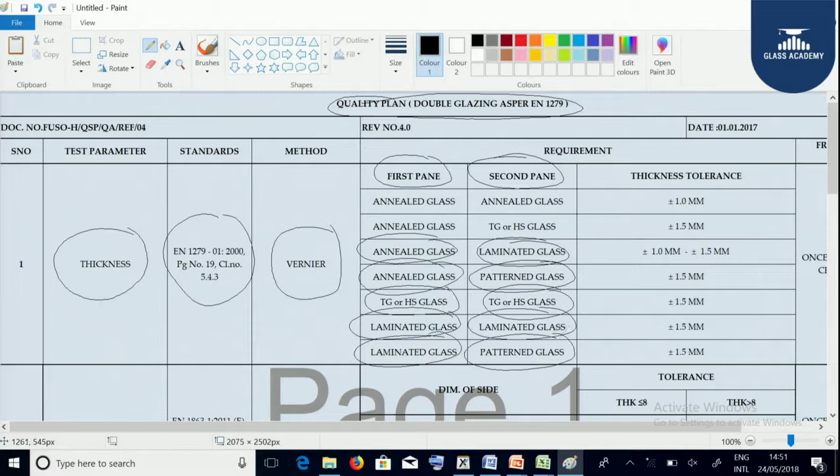As it is a double glazing unit, it consists of minimum 2 panes of glasses, the first pane and the second pane. The pane of glasses can be either annealed or toughened or HS, annealed or laminated glass, annealed or patterned glass, toughened or HS glass, lamination with laminated glass, laminated and patterned glass. So the combination of the panes can be any.

So here we need to understand thickness tolerance. When the glass is of annealed combination, the overall thickness allowed is plus or minus 1 mm. When the glass combination is annealed and toughened or HS glass, the overall thickness tolerance is plus or minus 1.5 mm. When the glass combination is annealed and laminated glass, the thickness tolerance shall be plus or minus 1 mm to plus or minus 1.5 mm.

When the glass combination is annealed and patterned glass, the thickness tolerance is plus or minus 1.5 mm. When the glass combination is toughened or HS glass and toughened or HS glass, the thickness tolerance is plus or minus 1.5 mm. When the glass combination is laminated glass plus laminated glass, the thickness tolerance is plus or minus 1.5 mm. When the glass combination is laminated glass and patterned glass, the thickness tolerance is plus or minus 1.5 mm.

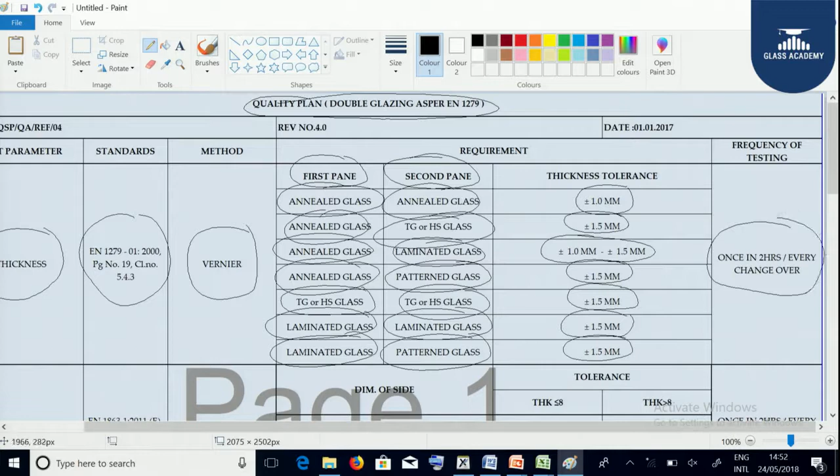The frequency of testing shall be once in 2 hours or every changeover. Whenever there is a change of thickness, then we need to recheck the thickness of the overall DGU.

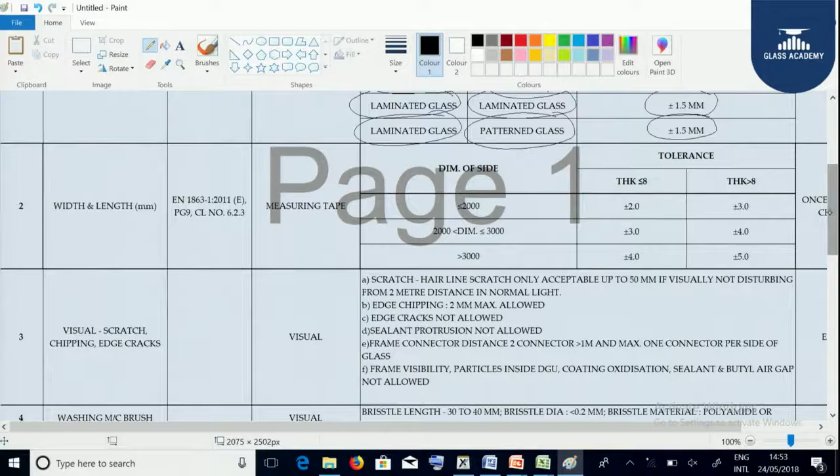Next, the second parameter is length and width, similar to the pre-process or tempering standard, that is EN1863 or EN12150. Visual inspections like scratches, chipping, edge cracks, all these are applicable as per the pre-process and tempering standards.

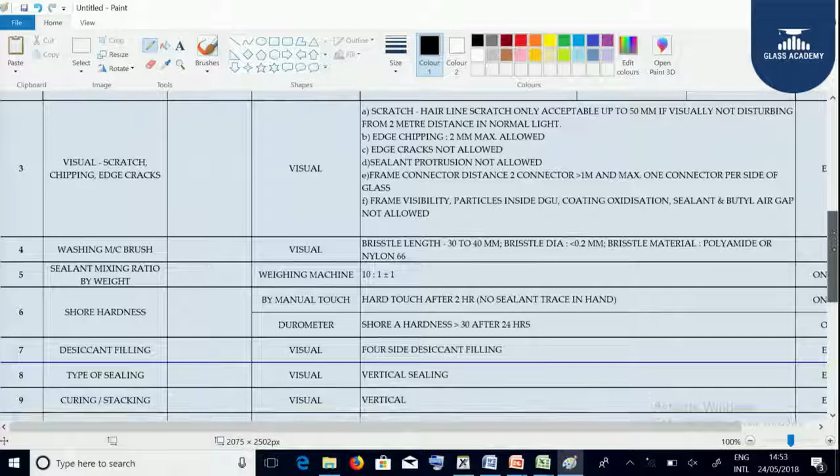Here we need to understand a few parameters: the washing machine brush quality, and we need to check the sealant mixing ratio. We generally measure with respect to volume and by weight, 10:1 plus or minus 1.

Here we need to check a few test parameters, like the shore hardness test. The tool we follow is the shore hardness meter, also called a durometer, and if it is a single part component, we use the manual touch method.

Next we need to check the desiccant filling, and in a particular linear meter of spacer how much desiccant we need to fill, and in all edges we need to fill. Type of sealing, whether it is vertical or horizontal sealing. Curing, what is the curing and stacking, that we need to address.

What is the delta T, that is the temperature difference, that we need to understand, and everything we will be undergoing through the lab tests that are coming in the later sessions.

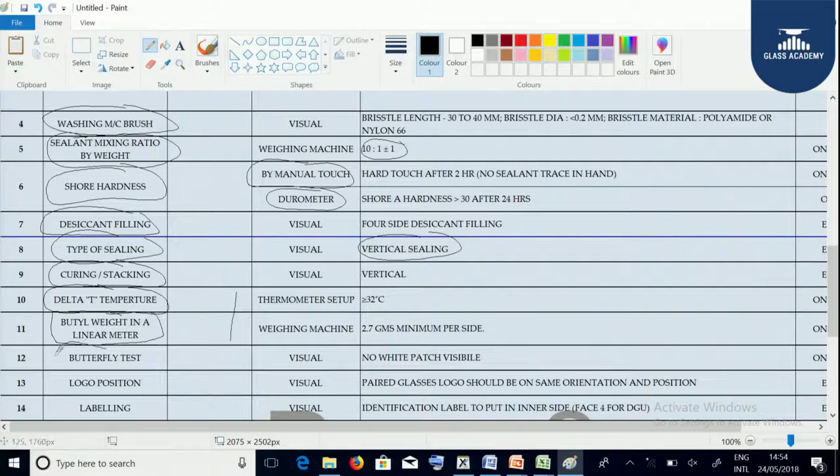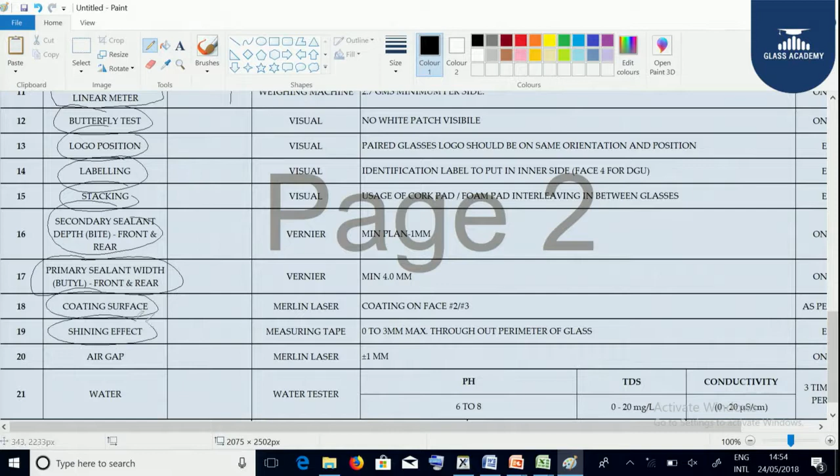We need to check the butterfly test. Next we need to see the secondary sealant depth. We need to see how we are stacking, what is the labeling position, where we are using the logo. Primary sealant butyl, how you are keeping front and rear coating surfaces, shining effect because of edge deletion, air gap, water - all these parameters we need to understand and keep in mind when processing a double glazing unit.

We can overcome this issue by checking the water parameters like conductivity, pH and salt contents in the water, and clean the rollers with acetone on a regular basis.

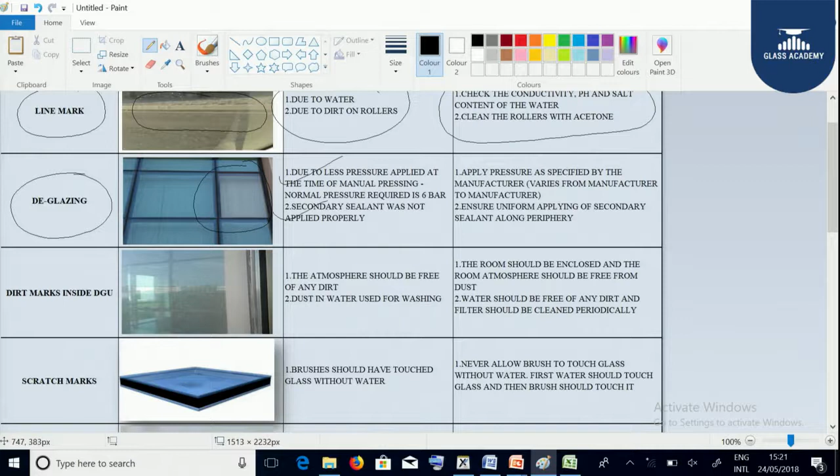Secondary sealant was not applied properly. We can overcome these issues by applying pressure as specified by the manufacturer, and ensure uniform application of secondary sealant along the periphery of the glass.

You can see the dirt marks inside the DGU in the figure. The reason being the atmosphere should be free from any dust, and water used for washing should also be clean.

We can overcome these issues. The room should be clean and enclosed, and room atmosphere should be free from dust. Water should be free of any dirt, and the filter should be cleaned periodically.

Next you can see the scratches on the glass surface. This is because the brushes should have touched the glass without water.

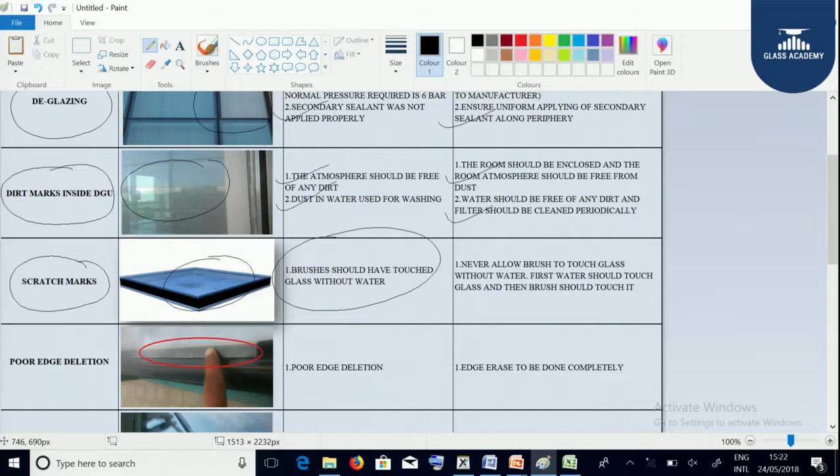We can overcome this issue by never allowing the brush to touch the glass without water. First the water should touch the glass, and then the brush should touch the water.

Next one is poor edge deletion. You can see here in the figure the edge deletion that we have done on the glass is not complete. If there is poor edge deletion, you can see the traces of the coating.

Our intention is that the coating surface should be completely removed, and the surface should be as good as clear glass.

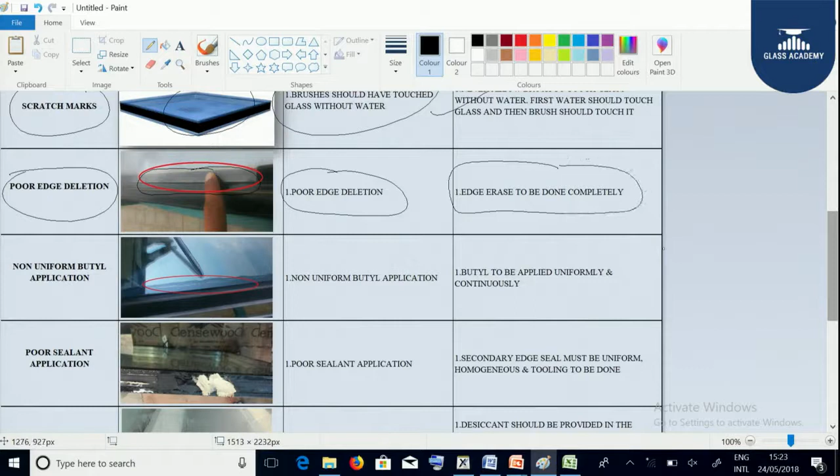This is because of poor edge deletion, and we can overcome this issue by properly doing the edge deletion with the proper wheel and proper pressure.

Next one is the non-uniform butyl application. You can see in the figure the butyl is like a zigzag line. Always the butyl should be straight and continuous.

The butyl acts as a moisture barrier. The reason for the zigzag line is non-uniform butyl application, and we can overcome this issue by applying butyl uniformly and continuously.

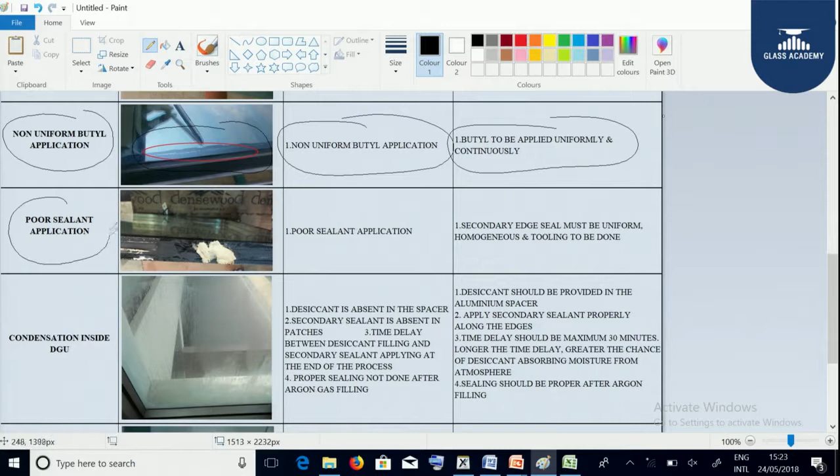Next defect we are going to get in DGU is poor sealant application. You can see there is insufficient depth or a continuity missing in the sealant.

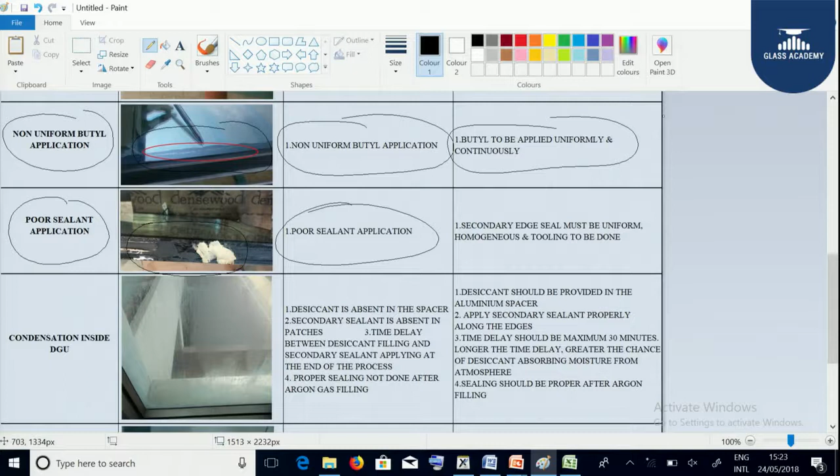The reason is poor sealant application. We can overcome this issue by maintaining a proper edge seal with uniformity, and tooling should be done once the pasting is done.

Next defect we are going to get is condensation inside the DGU, that is, moisture is trapped inside the DGU. The reasons are desiccant absent in the spacer, or secondary sealant absent in patches.

Other reasons include a time delay between the desiccant filling and the secondary sealant applying at the end of the process, or proper sealing not done after argon gas is filled.

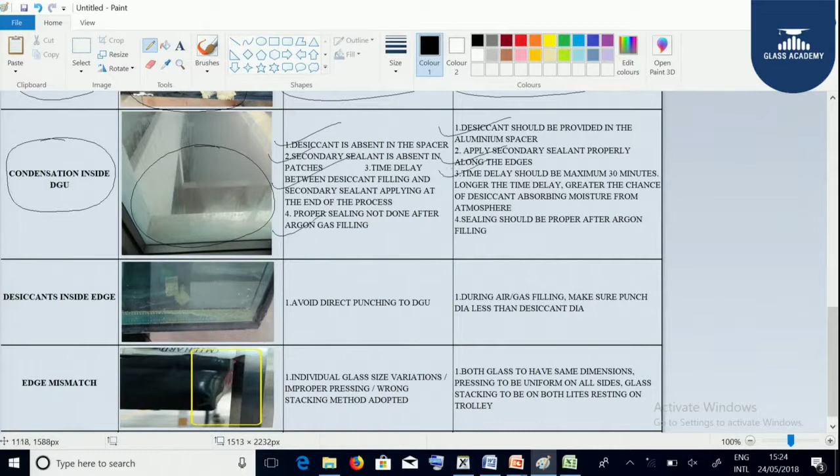We can overcome these issues: desiccant should be provided in the aluminum spacer, apply secondary sealing properly along the edges, and the time delay should be a maximum of 30 minutes. The longer the time delay, the greater the chances of desiccant absorbing moisture from the atmosphere.

And sealing should be done properly after the argon gas is filled.

The next defect you are going to get is desiccants inside the DGU. You can see here the desiccants have fallen inside the DGU. The reason is we should avoid direct punching to the DGU.

Generally, whenever we go to any glass which has desiccant inside, the major cause is the DGU got drilled, so we need to avoid direct drilling of the spacer.

We can overcome this issue with air or gas filling. Make sure that the punch diameter is less than the desiccant diameter.

Next defect you can see is the edge mismatch. You can see with the right angle there is an offset of the edge in the figure. The reason is individual glass size variations, improper pressing, or a wrong stacking method adopted.

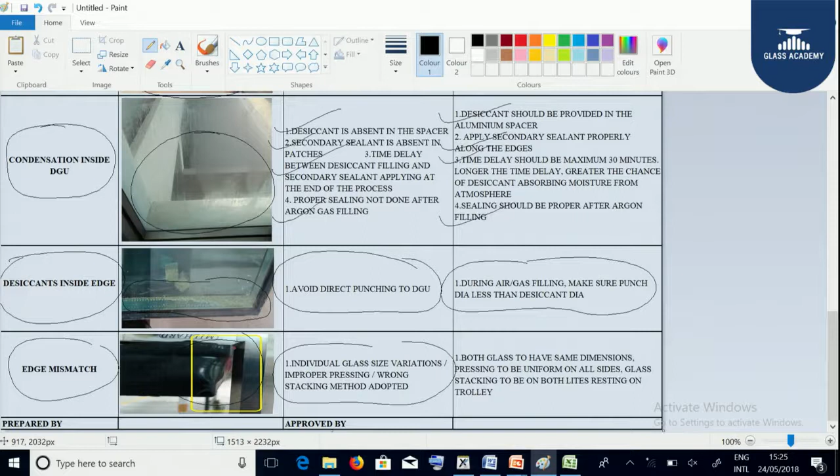You can overcome this issue by ensuring both glasses have uniform dimensions, pressing is uniform on all sides, and glass stacking is uniform, resting evenly on the trolley.

So now we will be starting the various tests applicable for an insulating glass unit. Let us start with the butterfly test, which we perform on the secondary sealant.

The secondary sealant is available in three forms in the market: for insulating glass units, for structural glazing units, and for weathering sealant. Now let us take the insulating glass sealant.

The purpose of doing the butterfly test is, since the secondary sealant is a two-part component, we need to maintain the homogeneity of the two parts of the sealant. One of the tests used to check homogeneity in the mixing is the butterfly test.

The procedure is: first we take a bead of sealant onto a piece of paper, fold it, and then try to open it.

When we open, the shape of the sealant shall come like a butterfly, that is why it is called a butterfly test. If once you open the paper and you are able to see any white patches in the sealant, then there is a mixing issue in the sealant. If there is no mixing issue, the sealant will come out black. So through this butterfly test, we are ensuring that the homogeneity of the mixing of the two-part sealant is maintained.

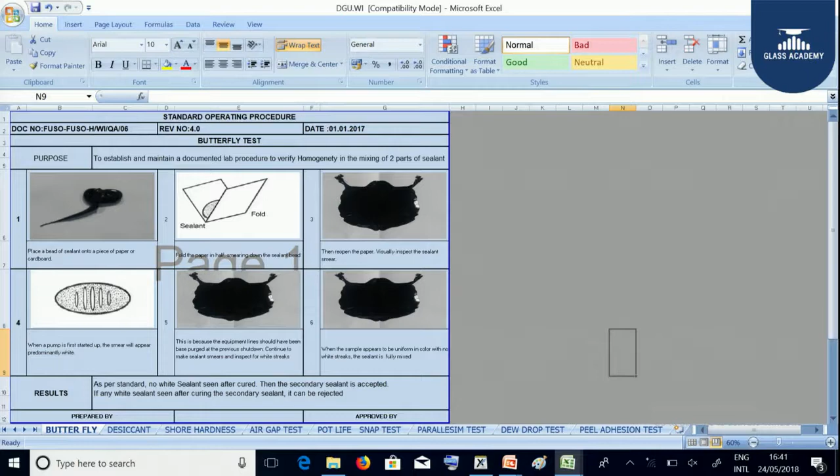Next test is a desiccant test that we use inside the spacer to absorb the moisture. First we'll take 20 ml of water in a beaker, then measure the temperature of the water. Then we'll take 20 grams of desiccant and pour it inside the water, and we'll check the temperature after the desiccant is kept inside the water.

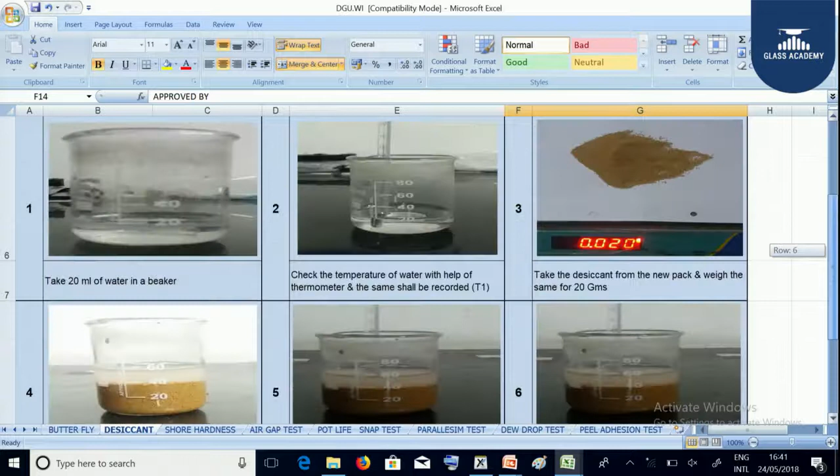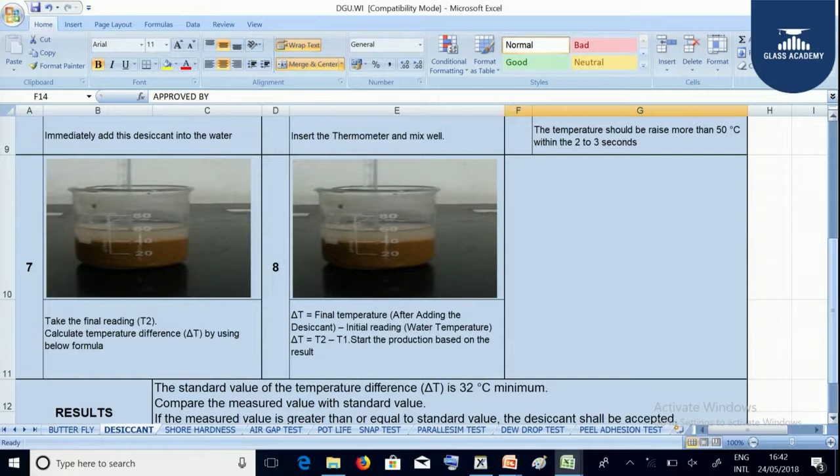Within a fraction of seconds, the temperature will rise. Then we'll calculate the temperature difference, that is, after adding the desiccant what is the temperature minus initial water temperature, which gives the desiccant temperature, and it should be minimum 32 degrees centigrade. The standard value for temperature difference is 32 degrees centigrade minimum.

Next we'll see the shore hardness test. This test is used to check the hardness of the secondary sealant. The procedure is we take a 2-part sealant into a 100 by 100 mm square plate of 10 mm thick layer. Then we apply secondary sealant on the 100 by 100 mm square area, and after 24 hours of production we try to see the hardness with the help of a shore hardness tester.

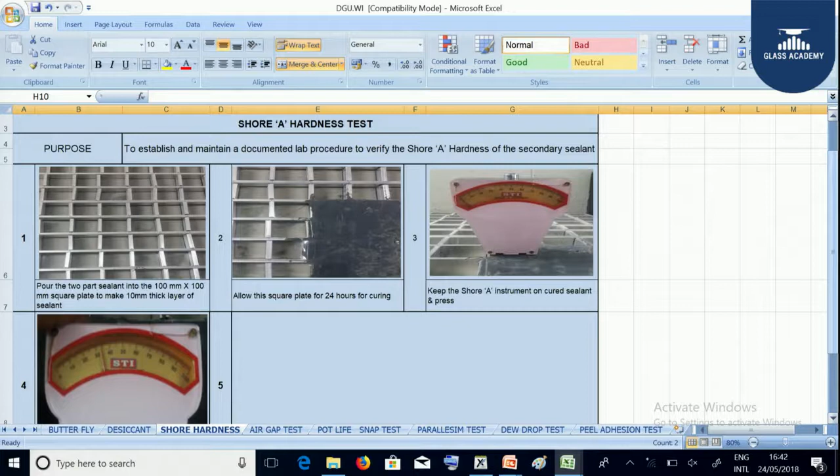We keep the shore hardness tester on the sealant and measure the reading. If you get more than 30, it's a good sealant. The standard acceptable value is 30 to 50 shore for secondary sealant. If you get a lower value, it still requires curing, and if you get a higher value, there are chances of the sealant becoming a sticky material. Secondary sealant should act as a rubber material.

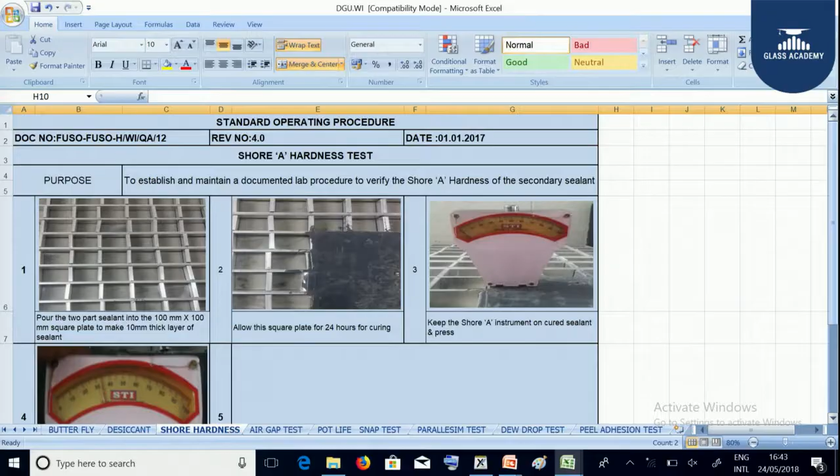Next we have one more test known as pot life test or snap test. This test is done to check the curing. Snap time will determine the curing time and the curing rate. This test is to establish that.

The procedure we follow is first we take a cup, and inside it we apply sealant. We take a spacer and insert it inside the cup, and we try to remove the spacer every 5 minutes. At a particular time it will not come out.

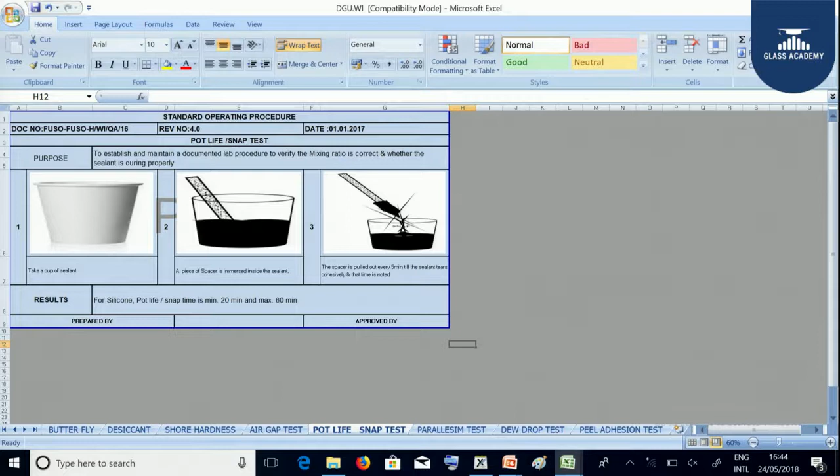We need to see whether it is a cohesive failure or adhesive failure and at what time. If it is tearing within itself at a particular time, we need to note down that time. For silicone, the snap time should be minimum 20 minutes and maximum 60 minutes. Basically the snap time determines the curing time between the glass and the spacer.

Next test is the parallelism test, used to measure the overall thickness of the DGU. First we place the DGU vertically at the edges or at the center of the 4 edges.

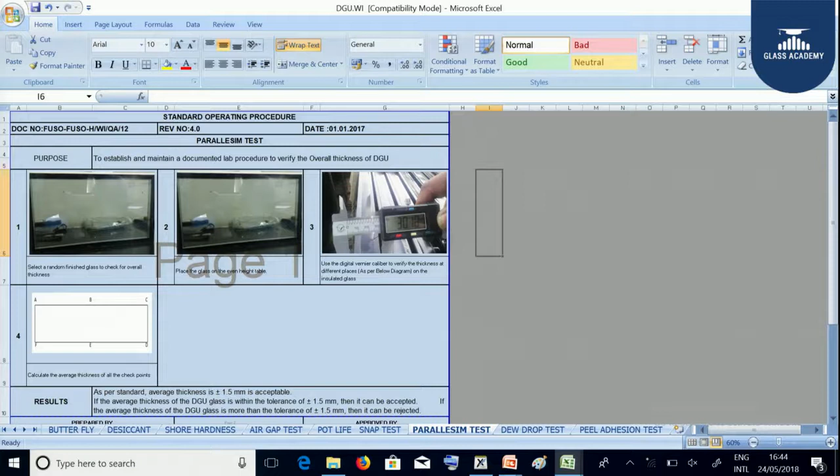We measure the thickness of the glass. Generally the thickness of the glass includes the individual glass thicknesses and the air gap that the DGU is covering. We should be measuring the overall thickness at the particular areas A, B, C, D, E, F. As per the standard, the thickness difference shall be plus or minus 1.5 mm acceptable.

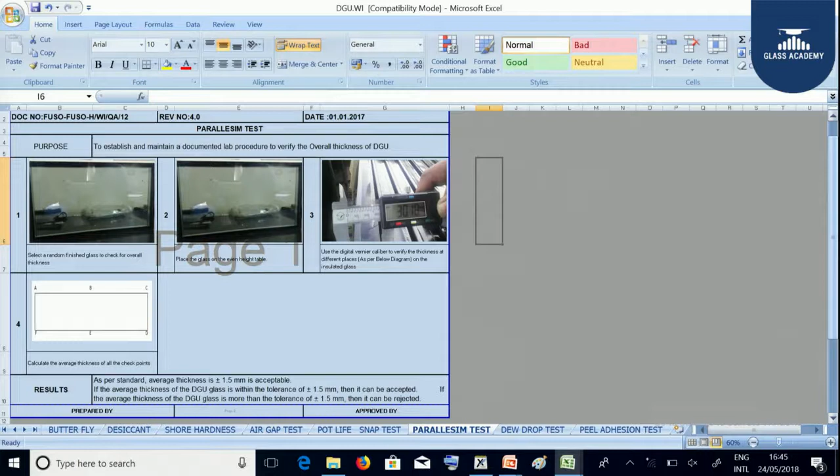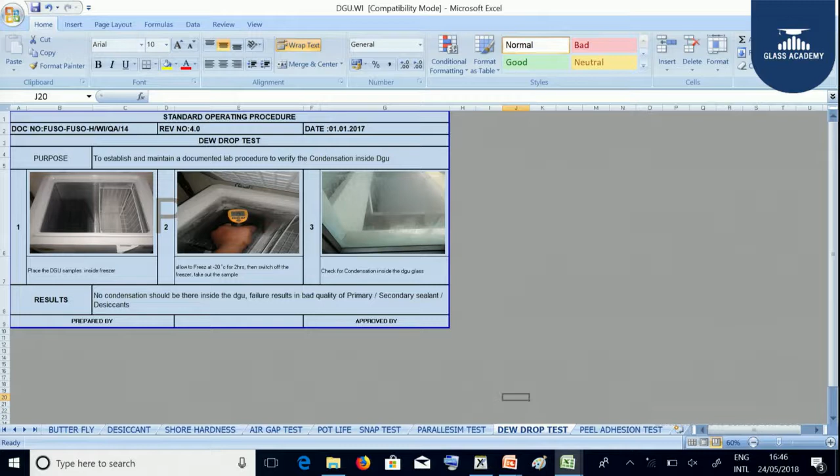With the help of a pyrometer, we will be measuring the temperature of the glass. If the glass is properly sealed with butyl continuity and desiccants, we will not find any condensation or dewdrop inside the DGU. If you are getting condensation inside the DGU like figure 3, this is because of a failure of the butyl, meaning the butyl is not continuous or there is a gap or discontinuity of butyl. The desiccants placed inside the spacer are not in a position to absorb the moisture. So for the dewdrop test, we need to find out 3 things: no condensation should be there inside the DGU. Failure shall result in bad quality of the primary sealant, secondary sealant and the desiccants.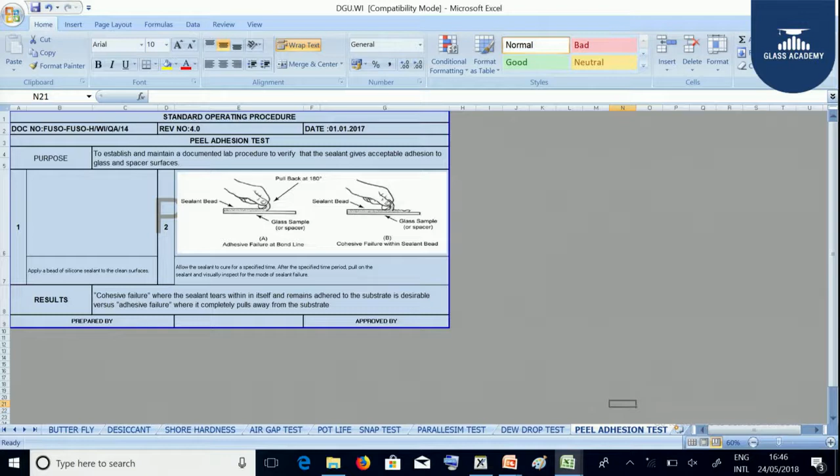Next we will see the silicone peel adhesion test. This is also one of the tests performed on the secondary sealant. We apply the sealant on a spacer and try to remove it. When the sealant comes out completely, this indicates adhesion failure between the secondary sealant and the spacer. In figure B, there is a cohesive failure where some of the sealant is still sticking to the spacer. With the help of this peel adhesion test, we can measure the adhesion between the spacer and the sealant. Now we'll understand the tests performed for the insulating glass unit or double glazing unit.

Generally, a double glazing unit is a combination of two glasses with an air gap in between. As we are assembling two glasses with the air gap, the DGU glass acquires insulation properties with respect to heat and with respect to sound, thereby giving energy conservation parameters. In insulating glass, apart from the glass, there are many components which make up the DGU glass. Now we'll understand one by one what is their importance and how all these parameters contribute to the combination of DGU, helping in its durability and performance.

Now let us understand each one by one. Corner keys: corner keys must be dry and clean. Corner keys must fit tightly into the spacer bar. Soldering or butyl injection of the corner key is recommended.

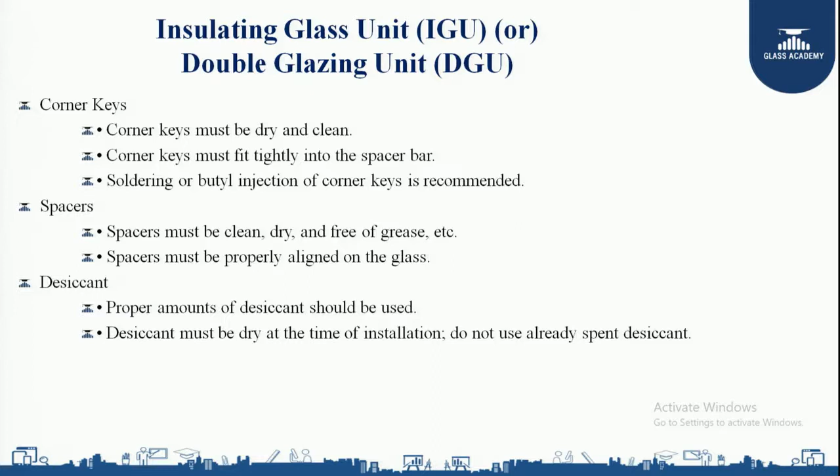Next, glass: the glass surface must be properly cleaned and free from fingerprints. Proper maintenance of glass cleaning equipment and solution is essential. Glass lites should have no edge defects or inconsistencies. Glass lites must be properly aligned with the spacer.

Now let us understand PIB, polyisobutylene primary seal. The primary seal must be applied in a continuous, uninterrupted bead free of voids or skips. No excess PIB should protrude into the secondary seal cavity. The primary seal must be uniformly and sufficiently pressed to give an even thickness and good adhesion to the glass and spacer surfaces.

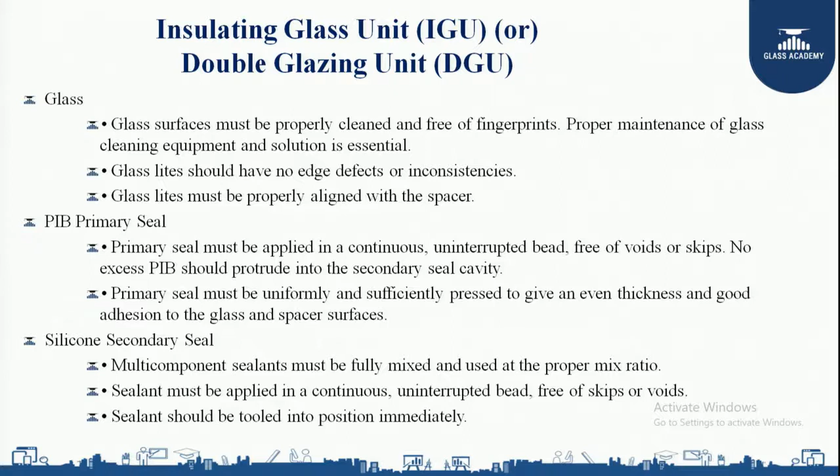Silicon, the secondary seal: multi-component sealants must be fully mixed and used at the proper mixing ratio. Sealant must be applied in a continuous, uninterrupted bead free of skips or voids. Sealant must be tooled into position immediately.

Now we'll see what do you mean by bite. Bite is nothing but the area that has to be edge removed, or the depth of the silicon. The bite will give you structural strength - strength with respect to wind pressure, strength with respect to thermal deflection, and strength with respect to dead load or self weight of the glass. So basically the silicon gives structural strength to the DGU product.

Now this is how we are going to calculate the bite. Using the appropriate mathematical derivation, the following calculations can be used to determine the structural sealant bite, which holds the IG unit to the curtain wall mullion. Structural sealant bite, in inches, is equal to half of the smallest leg of the largest lite, multiplied by wind load, divided by sealant design strength. When it comes to IGU sealant bite, it is equal to 50% of half of the smallest leg of the largest light, multiplied by wind load, divided by sealant design strength.

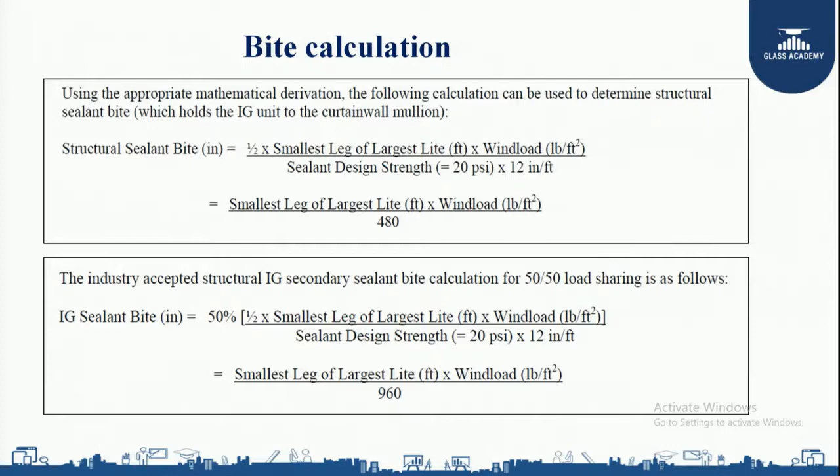You can see here the sealant for IGU bite calculation and for the 50 by 50 load sharing - this is the formula we are going to use to calculate the bite. Now we'll understand each test one by one, what we do in DGU glass.

Butterfly test: when we talk of secondary sealant, it is the sealant we use to make the insulating glass unit. It is a two-part component, a mixture of base and hardener. We need to ensure proper mixing of the base and hardener, which is verified through the butterfly test. The purpose of the butterfly test is to verify the homogeneity in the mixing of the two parts of sealant.

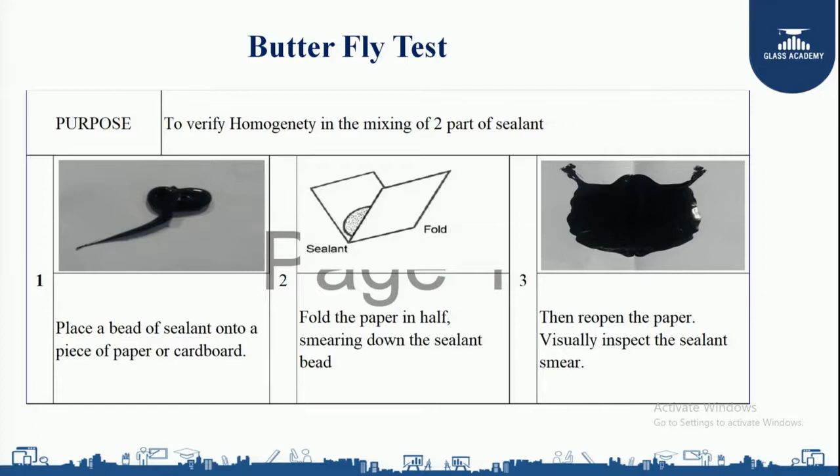Place a bead of sealant onto a piece of paper or cardboard, then fold the paper in half, smearing down the sealant bead. Reopen the paper and visually inspect the sealant smear. When a pump is first started up, the smear will appear predominantly white, because the equipment lines should have been base-purged at the previous shutdown. Continue making sealant smears and inspect for white streaks. When the sample appears uniform in color with no white streaks, the sealant is fully mixed.

The result: butterfly test should be performed with multi-component sealants at least every time a pump is started, if not intermittently throughout the day's production. As per the standard, if no white sealant is seen after curing, the secondary sealant is accepted. If any white sealant is seen after curing, the secondary sealant is rejected.

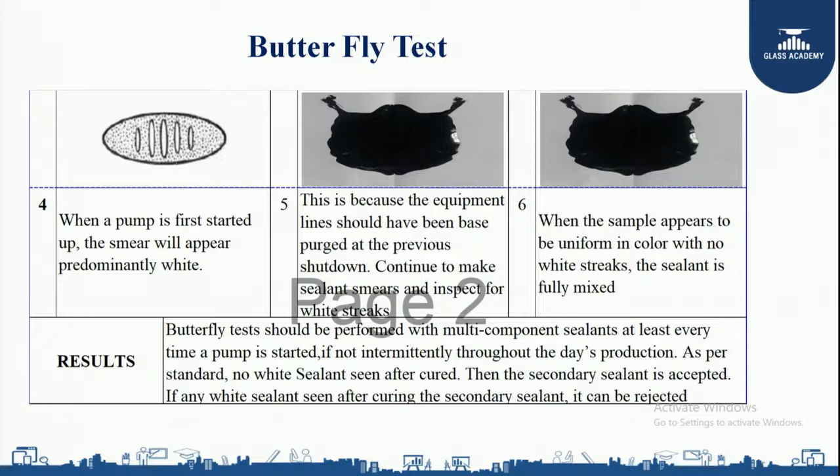Next is the desiccant test, or molecular sieve test. The purpose of this test is to establish and maintain a documented lab procedure for verifying the effectiveness of the desiccants. The purpose of desiccant is to absorb the moisture inside the DGU.

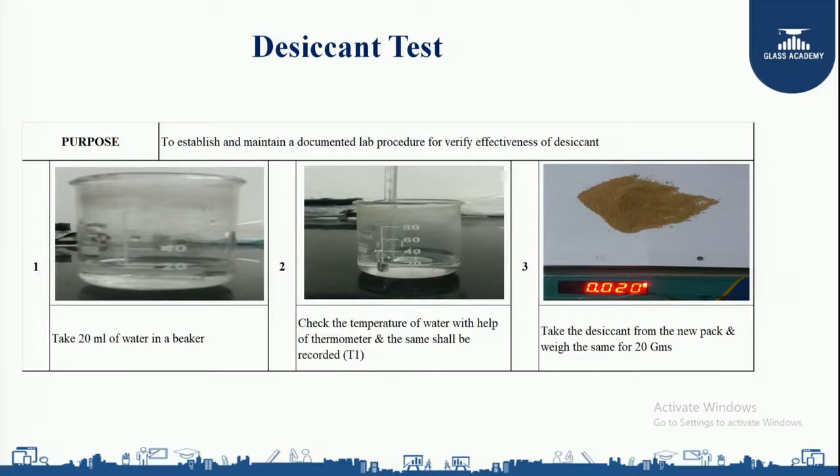To check whether the desiccants are able to absorb moisture, first we take 20 ml of water in a beaker. Then the temperature of the water is checked with a thermometer and recorded as T1. Then we take desiccants weighing 20 grams and immediately add them into the water, insert the thermometer, and mix well.

The temperature should rise more than 50 degrees centigrade within 2 to 3 seconds. Take the final reading, that is T2. Calculate the temperature difference using the formula: delta T equals the final temperature after adding the desiccants minus the initial water temperature. That is, delta T equals T2 minus T1.

Start the production based on the result. The standard value for the temperature difference is 32 degrees centigrade minimum. Compare the measured value with the standard value.

For example, if my room temperature is 25 degrees centigrade and my desiccant temperature comes to 75, then 75 minus 25 gives delta T of 50 degrees centigrade, and the minimum required is 32 degrees centigrade. If the measured value is greater than or equal to the standard value, the desiccant shall be accepted and is in a position to absorb moisture. When the measured value is less than the standard value, the desiccant shall be rejected.

Next is the shore hardness test. Through this test we ensure the hardness of the secondary sealant. The purpose is to check the hardness of the secondary sealant. We pour the 2-part sealant into a 100 mm by 100 mm square plate to make a 10 mm thick layer of sealant.

Allow the square plate 24 hours of curing. Keep the Shore A instrument on the cured sealant and press, then note the reading from the Shore A instrument. As per the standard, the acceptable value is 30 to 50 Shore A for silicone sealant.

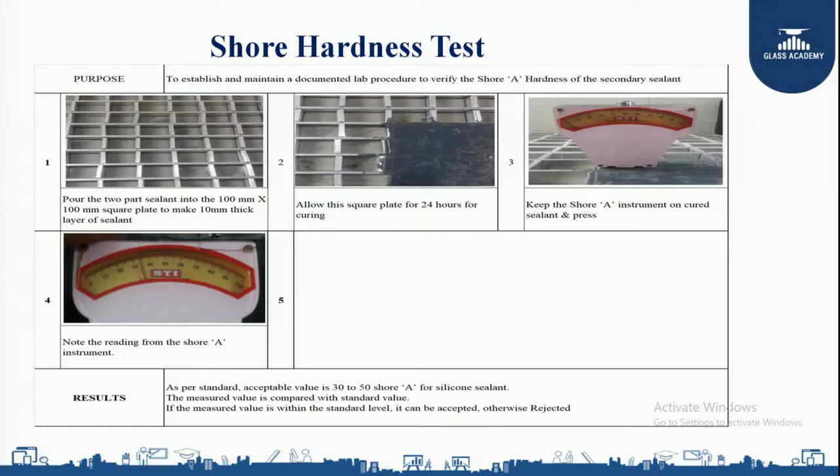Next test is the pot life or snap test. This test is performed to verify that the mixing ratio is correct and whether the sealant is curing properly. The procedure is: first take a cup of sealant, then immerse a piece of spacer inside the sealant. The spacer is pulled out every 5 minutes until the sealant tears cohesively, and the time is noted.

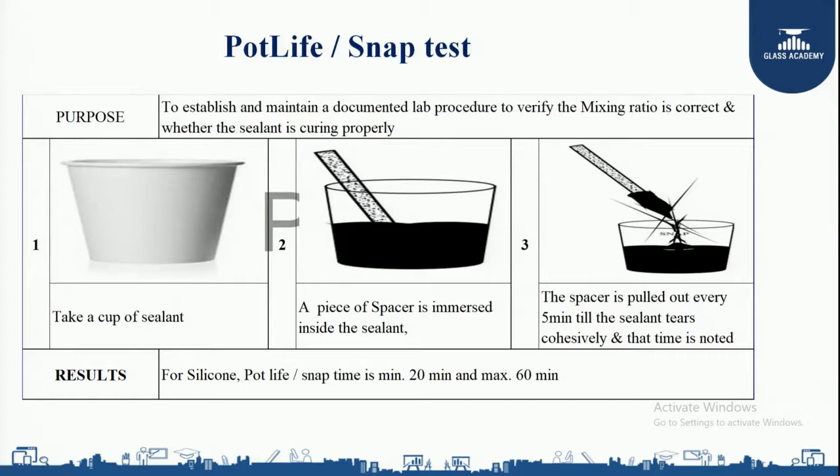For silicone, the pot life or snap time is minimum 20 minutes and maximum 60 minutes. So through the pot life or snap test, we are ensuring the curing time. Next is the parallelism test, which is used to check the overall thickness of the DGU.

As the DGU is a combination of two glasses with the aluminum spacer, we need to ensure the overall thickness of the DGU, and that we are going to ensure through parallelism test. First, we will take a DGU finished product and place it vertically.

Then using the digital vernier caliper, we need to measure the thickness at the center of the 4 edges. As we can see in the figure, A, B, C, D, E, F, we need to take the average thickness.

As per the standard, average thickness allowed is plus or minus 1.5 mm. If the average thickness of the DGU glass is within the tolerance of plus or minus 1.5 mm, then it is accepted. If it is more than the tolerance, then it is rejected.

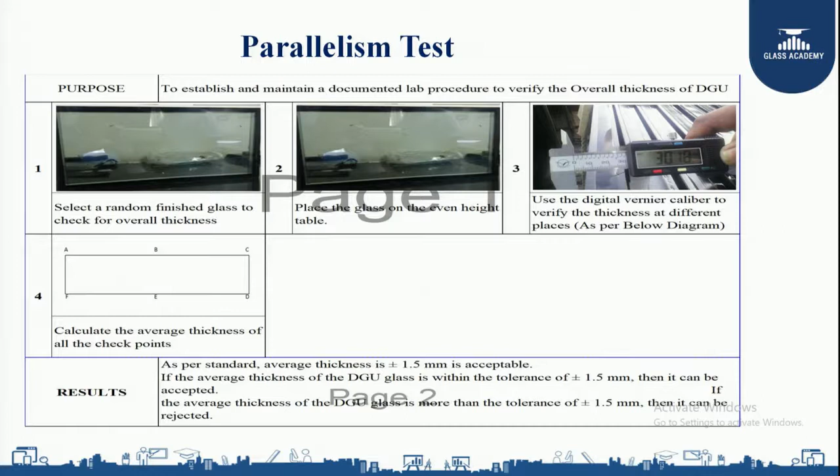Next one is the dew drop test. What we do is check the condensation inside the DGU.

Condensation can happen either on the outside surface, inside surface, or in between the DGU. Outside or inside can be wiped out, whereas in between the DGU is not okay. In that case, we need to check the primary sealant continuity, secondary sealant curing and hardness, and whether the butyl and desiccant are in a position to absorb the moisture or not.

So the pass condition for condensation is that there should be no condensation inside the DGU. Failure results from bad quality of primary sealant, secondary sealant, and desiccant.

You can see in figure 1, the DGU glass is placed inside the freezer. Then it is frozen at minus 20 degrees centigrade for 2 hours. Then it is taken out to inspect whether it has any condensation inside the DGU.

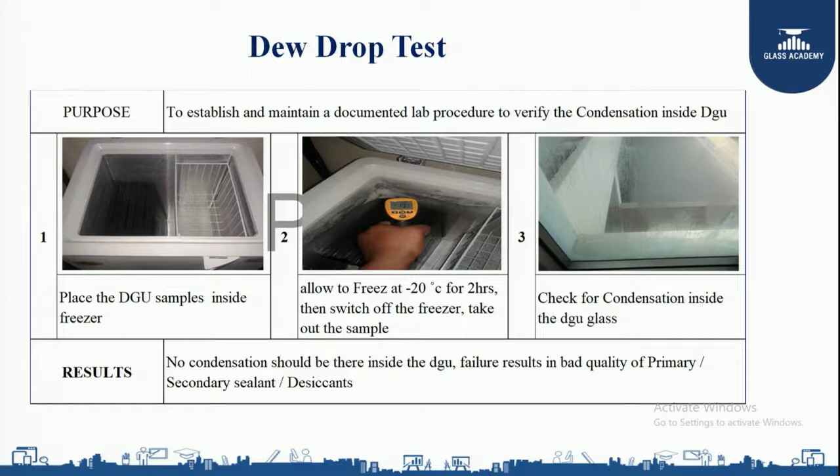Next one is the silicone peel adhesion test. The purpose of this test is to ensure the bonding or adhesion between the glass, silicone, and the spacer. The sealant gives acceptable adhesion to the glass and spacer surfaces.

The procedure for this is to apply a bead of silicone sealant to the clean spacer surface, allow the sealant to cure for a specified time. After the specified time period, pull out the sealant and visually inspect for the mode of sealant failure.

You can see in the figure, when I try to pull back at 180 degrees, the sealant separates from the glass sample - this is an adhesive failure. The same thing when I try to pull out in figure B, there is a cohesive failure where the sealant is tearing within itself.

So an adhesive failure is a bad sign, whereas a cohesive failure is recommended. We can see in the result that cohesive failure, where the sealant tears within itself and remains adhered to the substrate, is desirable versus adhesive failure, where it completely pulls away from the substrate.

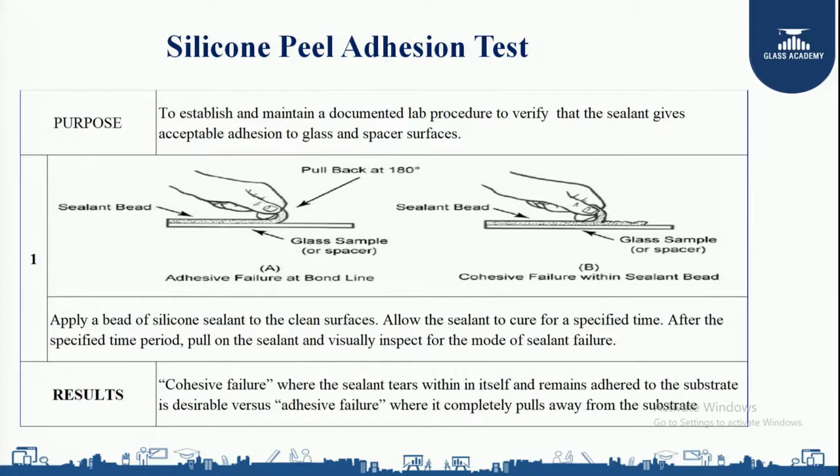Next test is the glass thickness test and air gap test. As it is a DGU glass, it is a combination of minimum 2 glasses with an air gap. With the help of the air gap tester, we can determine the thickness of individual panes as well as the air gap in between the DGU.

With the help of the Merlin Lazer air gap tester, we just need to place the equipment on the glass surface and identify the readings. I will be placing this equipment on the DGU glass.

Once I press the button, I will get a minimum of 4 lines which indicate surface 1, surface 2, surface 3, surface 4. So when measuring from the first line, from right to left, the first line to the second line indicates the glass thickness.

Second line to third line indicates the air gap between the DGU, and third line to fourth line indicates the second glass thickness. So through this air gap tester, you are able to check glass thickness as well as the air gap inside the DGU.

Also, this equipment can be used to measure the coating surface, and if any PVB layer is present, that can also be traced through this equipment.

So you can see if it is a single glazing unit, you will get 2 surfaces, thereby 2 lines. If it is a double glazing unit, you will get 4 surfaces, thereby 4 lines. If it is a laminated DGU, you will get 6 surfaces, thereby 6 lines. If it is a double lami DGU, you will get 8 surfaces with 8 lines.

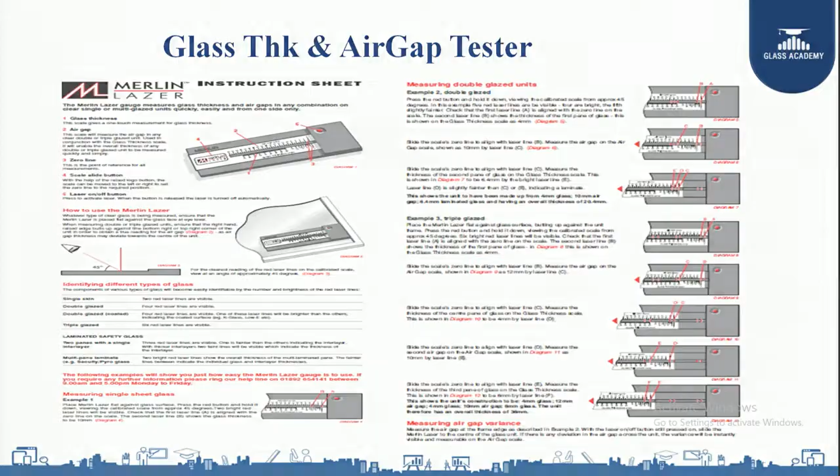Now, if you look at silicone, we have 3 types: structural silicone, insulating silicone, and weathering silicone. The silicone we use in architectural systems is the insulating glass silicone.

This is a 2-part component, a mixture of base and hardener. This is known as the butterfly test, which determines the mixing ratio between the base and the hardener, that is, the homogeneity between the two. We take a paper and a small quantity of silicone, then fold it.

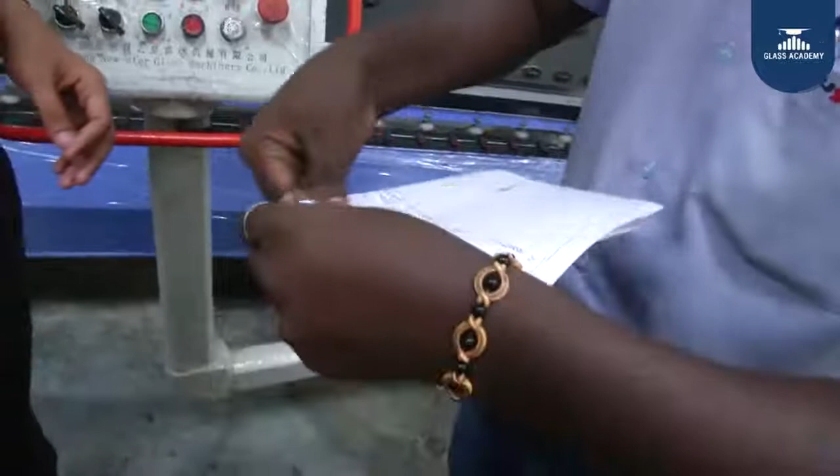We properly squeeze it. If we open it, this is how a butterfly test will look. By the shape itself, we can say it is a butterfly, looking like the wings of a butterfly. We need to check for any white patches inside the mixing. If there are white patches, the mixing is not okay. If there are no white patches, the mixing is okay.

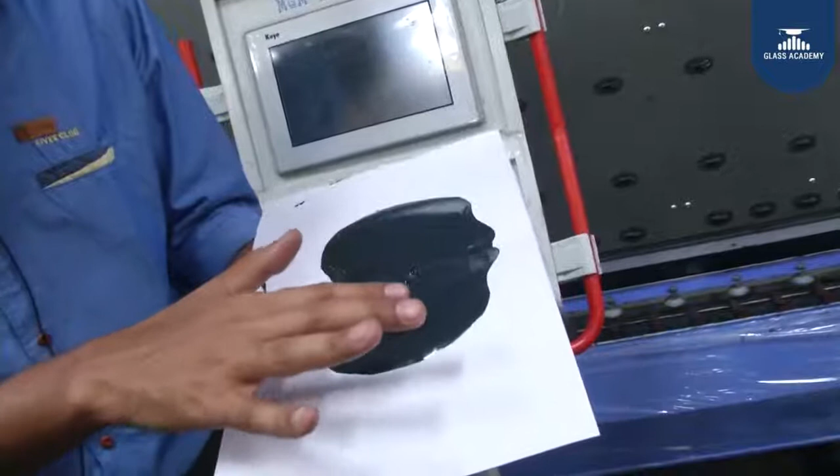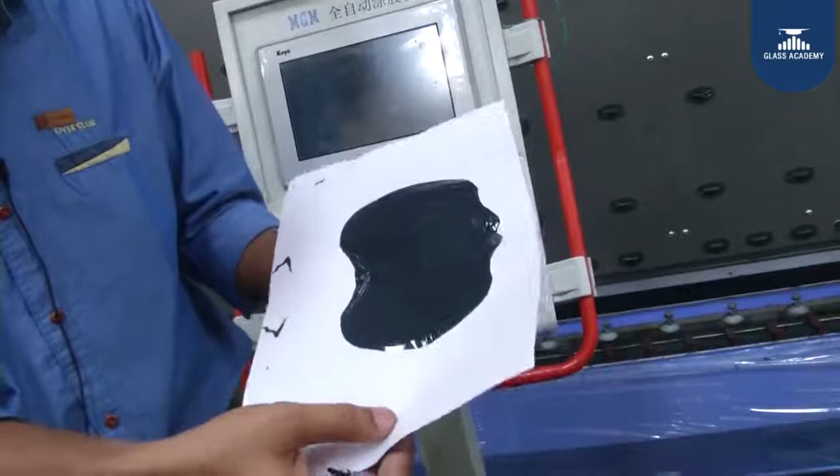We have one more test known as the skin over test. By placing your finger on the silicone, if you are able to feel wetness after 2 hours, we need to inspect further. If it is still touching after 2 hours, there is a mixing ratio issue. If it is not touching, the test passes.

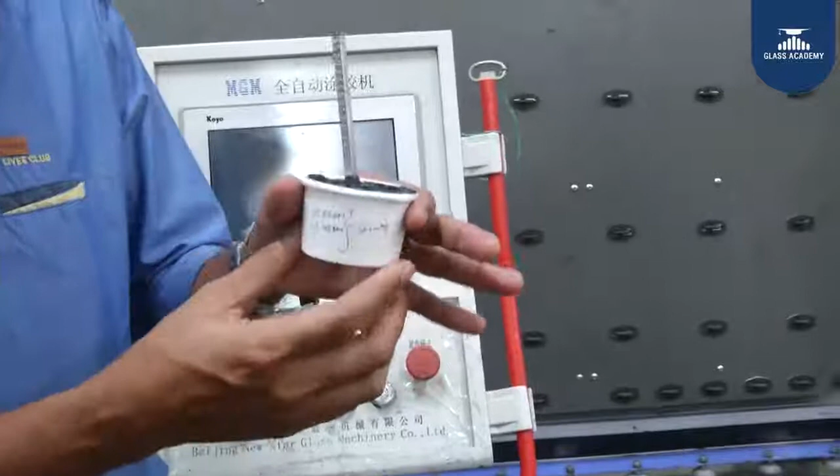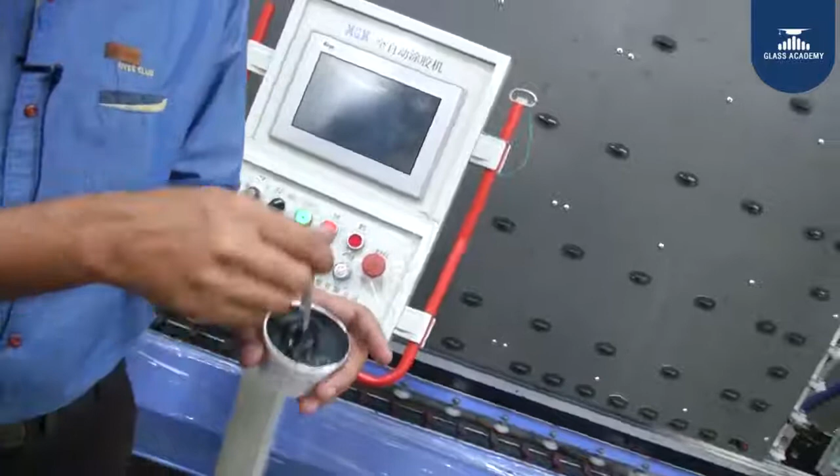This is one more test known as the spotlight or snap test. What we do is take a cup, keep a silicone inside it, and immerse the spacer. Every 5 minutes we try to pull out the spacer, and at a certain time it will break cohesively. That time we need to note down.

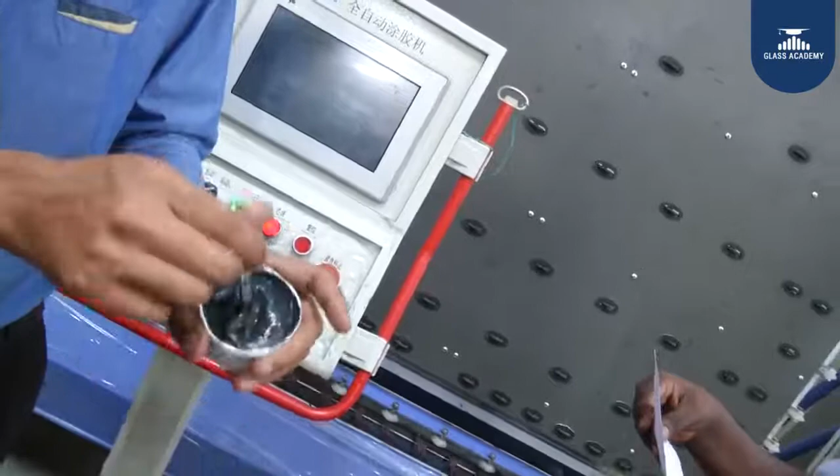Now we are going to do one more test known as the silicone peel adhesion test. This determines the bonding or adhesion between the silicone glass and the spacer. We cut a piece of silicone and try to pull it out. If the silicone comes out completely, that indicates weak bonding. If it breaks cohesively within itself, that indicates good bonding.

Now if you see here, it is not completely removed. Part of the silicone is still sticking to the glass as well as the spacer. This is known as the silicone peel adhesion test. The silicone should always have an elongation property.

And when we cut it, it does not come off directly. Some part of the silicone is still adhering to the glass and the spacer. This shows that the bonding between the glass, spacer, and silicone is good. This is known as the silicone peel adhesion test.

Now you see, it is breaking like this, so there is no spacer visibility. As long as there is no spacer visibility and the silicone is sticking to the glass and the spacer, the silicone is of good quality.

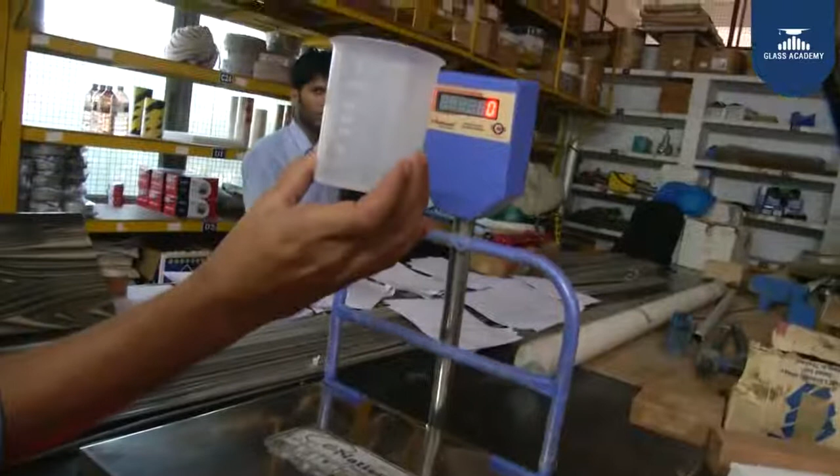Now we are going to perform a test known as the desiccant test or delta T test. What we do is take 40 ml of water, and next we take 40 grams of desiccants.

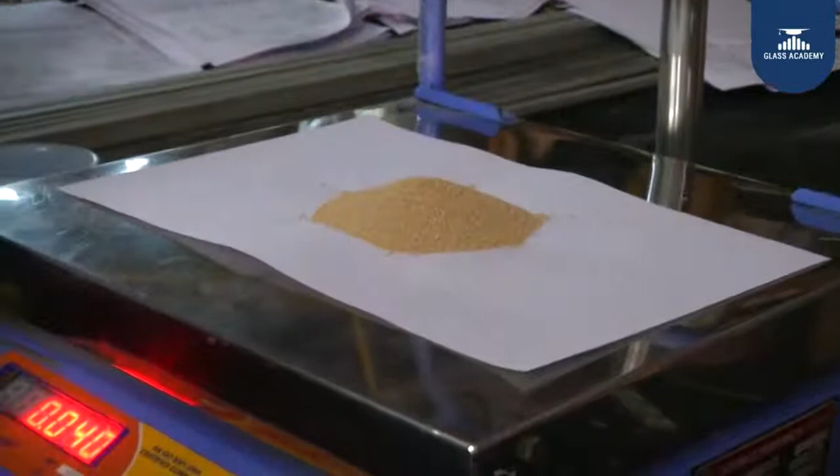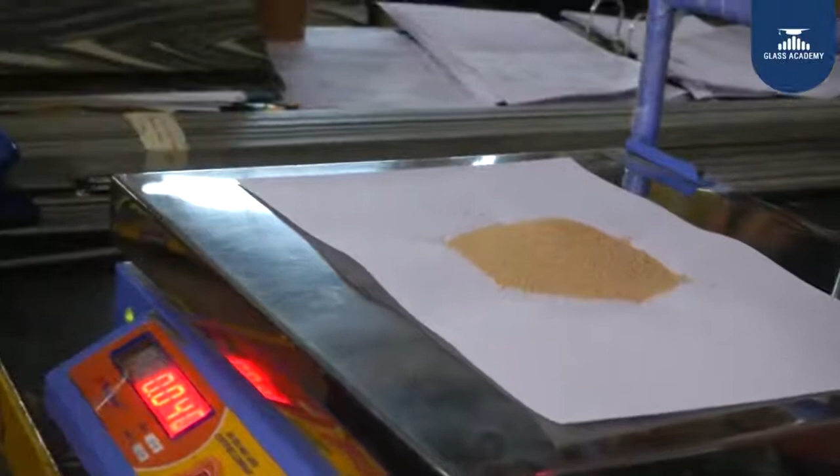Now we are going to take 40 grams of desiccants. With the help of a thermometer, we are going to measure the temperature of the water.

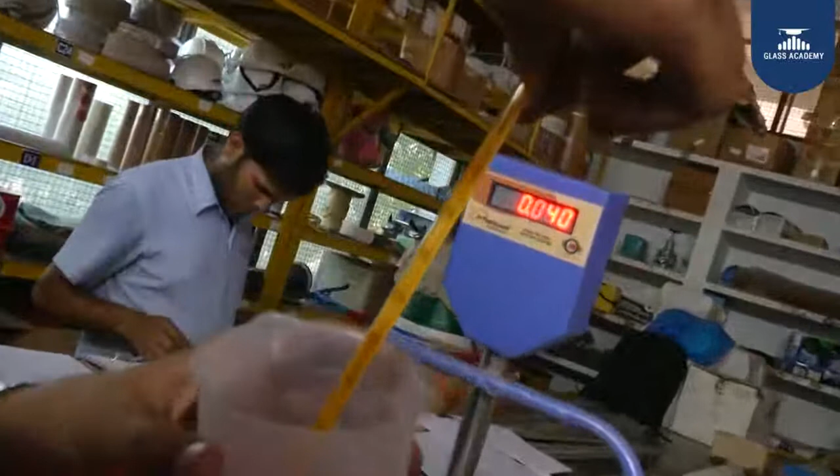You see the water temperature, it is 23 degrees centigrade. So note down 23 degrees centigrade as the initial temperature. Now we are going to place these desiccants inside the water. You see here, focus here.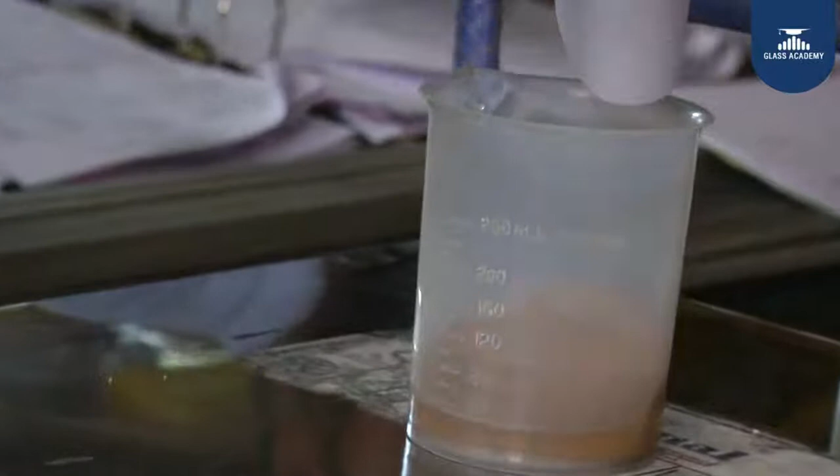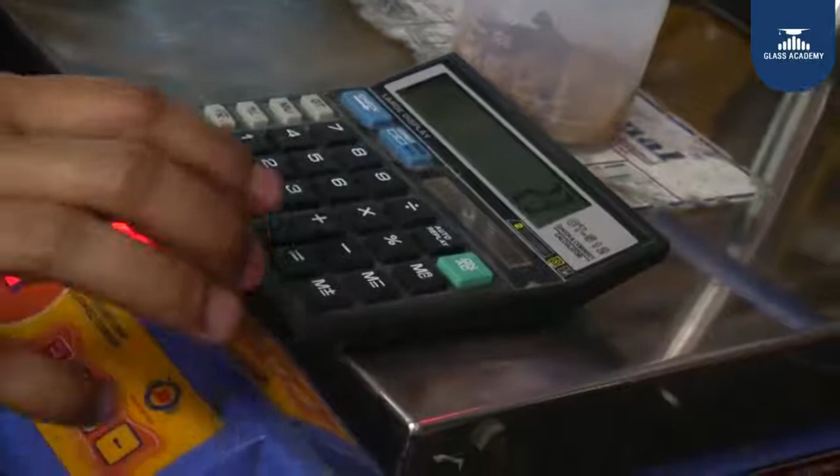You see, within a fraction of seconds, there is an increase in the temperature. Now the temperature is 65 degrees centigrade. So our delta T will indicate 65 minus 23, which is equal to 42 degrees centigrade. Minimum required is 32 degrees centigrade. So once the desiccants reach this, it shows they are in a position to absorb the moisture.

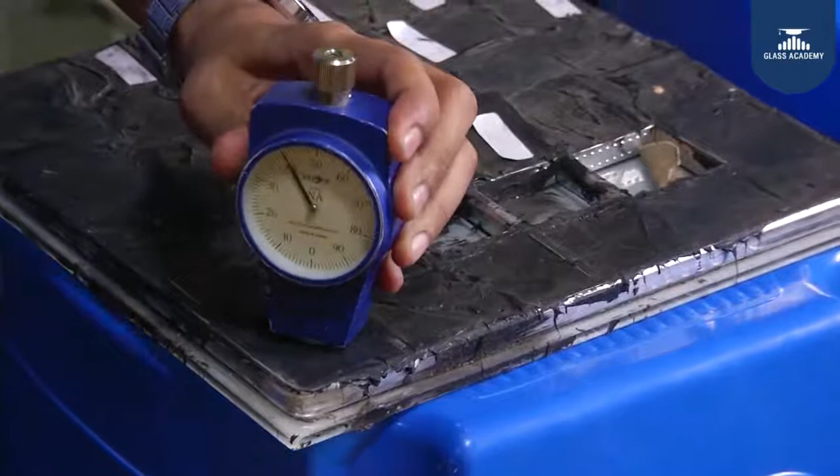Now this is one more test to determine the hardness of the secondary sealant, known as Shore hardness tester. We'll take a Shore hardness tester and a silicone sample, placing it on a glass with spacers supporting it. We'll place this equipment on the silicone and check the hardness of the secondary sealant. You see it is coming to 42, so the unit is 42 Shore A. The desirable reading should be in between 20 and 60, where we are getting 42 Shore A. So this test will determine the hardness of the secondary sealant.

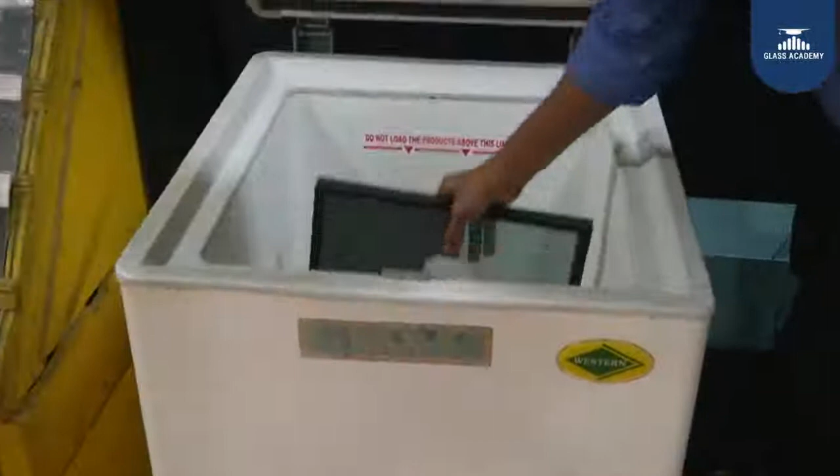Next, with respect to DGU we have seen butyl, pot life. Now this is one of the in-house tests used to check the condensation or dew drop inside the DGU. We take a DGU sample and place it inside the freezer at minus 18 degrees centigrade for 2 hours, to make sure under extreme negative temperatures how the DGU performs. If any condensation is there inside the DGU, whether the desiccants are able to absorb the moisture, any discontinuity in butyl, and whether silicone is properly sealed, we need to check. If you see, there is no condensation formed inside the DGU. So this test will determine the performance of the desiccant, how the butyl is acting as a barrier to moisture, and how the secondary sealing is protecting the surface and giving structural strength to the glass.

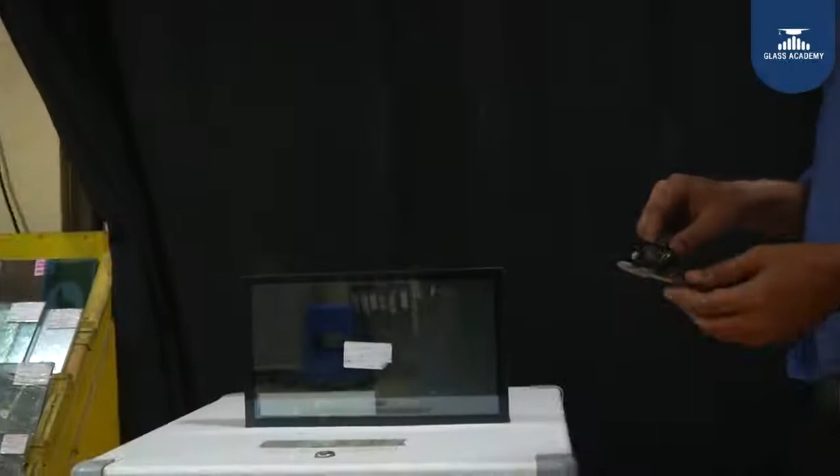Now we are going to see one more test related to the final product of DGU, known as the parallelism test. As the DGU is a composition of two glasses with an airspace in between, we need to measure the overall thickness of the glass, because the glass can be heat strengthened, toughened, or annealed, and in between there is also an air gap.

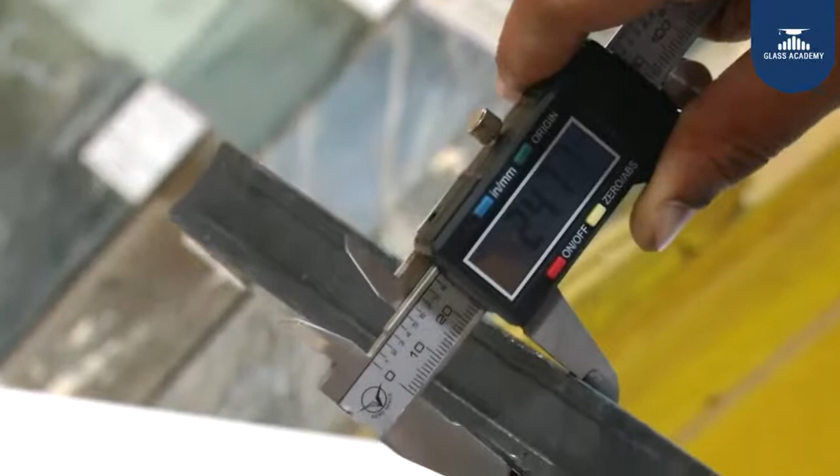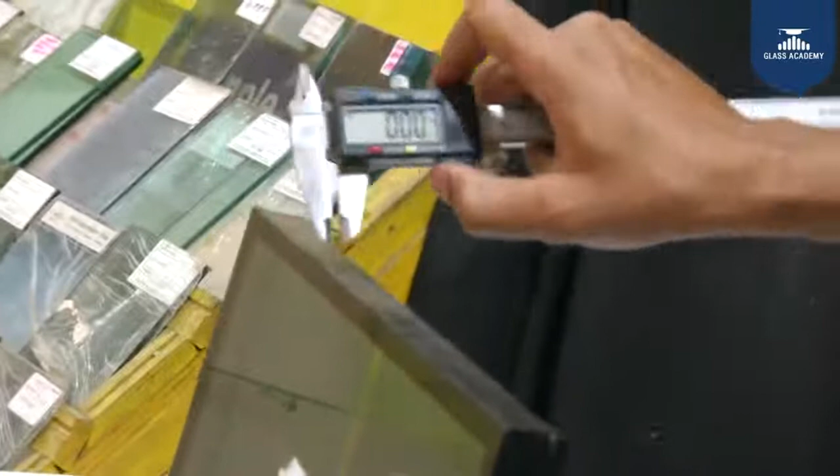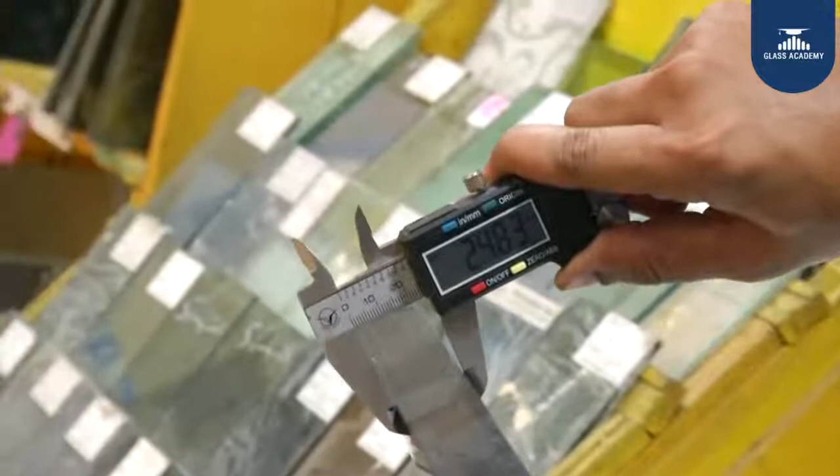Through the help of a vernier caliper, I am measuring the overall thickness at different positions of the DGU. The value is coming to be 24.71 at this particular area. The same measurement on this thickness is coming 24.87. Now measuring on the other side, it is coming 24.82. Now measuring on the other side again, we are getting 24.7981. So if you see, the average overall thickness is almost remaining the same.

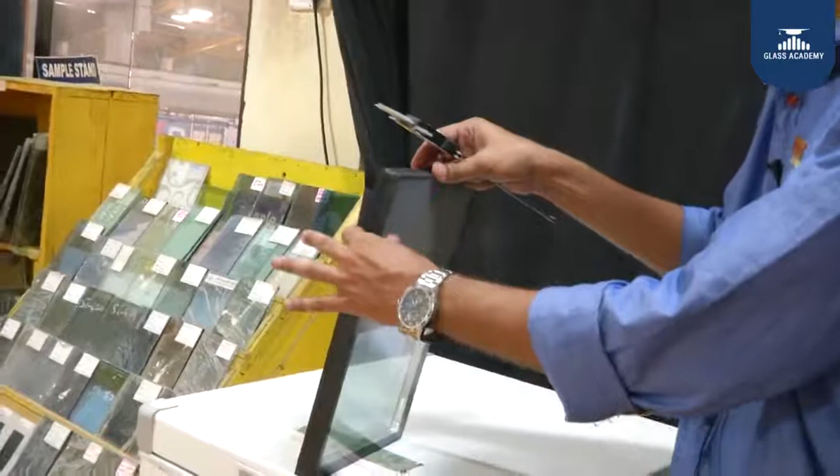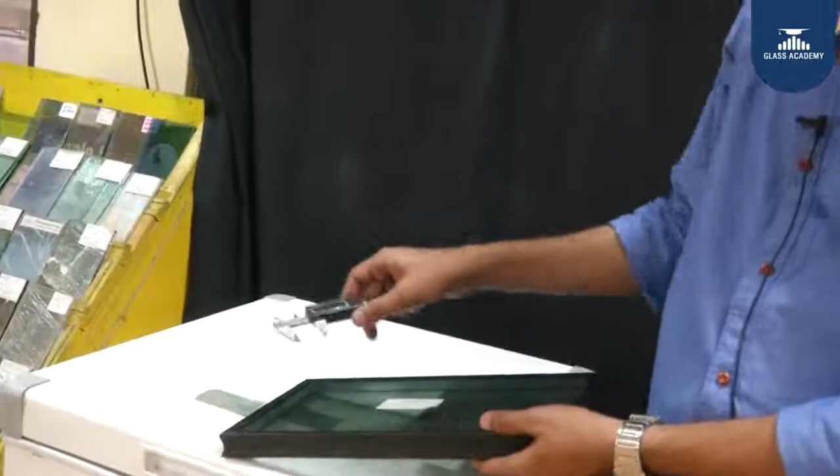If you see, the glass combination is 6 mm, 12 mm, 6 mm, so it should be 24 mm, whereas we are getting 24.7 on an average. As per the standard, plus or minus 1.5 mm is allowable. So through this test, we are assuring that the overall thickness of the DGU is maintained throughout the product.

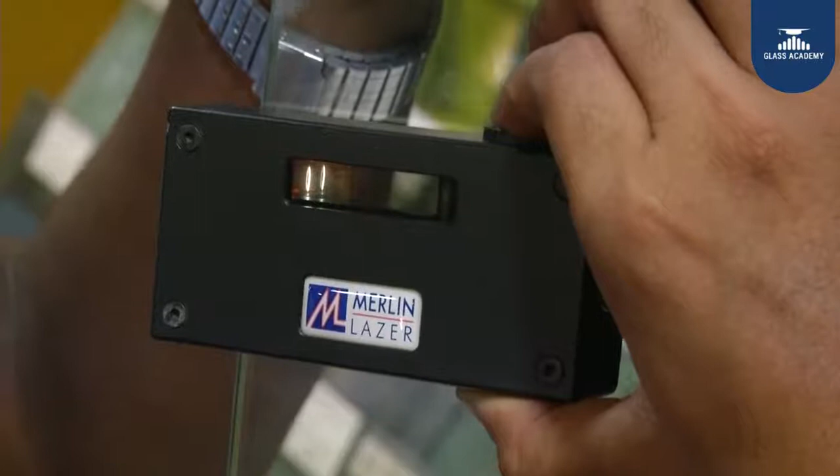Now this is one more equipment similar to the gas test, known as the toughened glass indicator. We are going to see whether the glass has been heat treated or not with the help of this toughened glass indicator. I am placing it on the glass surface and moving across the surface, checking for any change in the color of the lighting. When moving across the glass, I am able to find a change in the color of the second line, which indicates the glass has been heat treated.

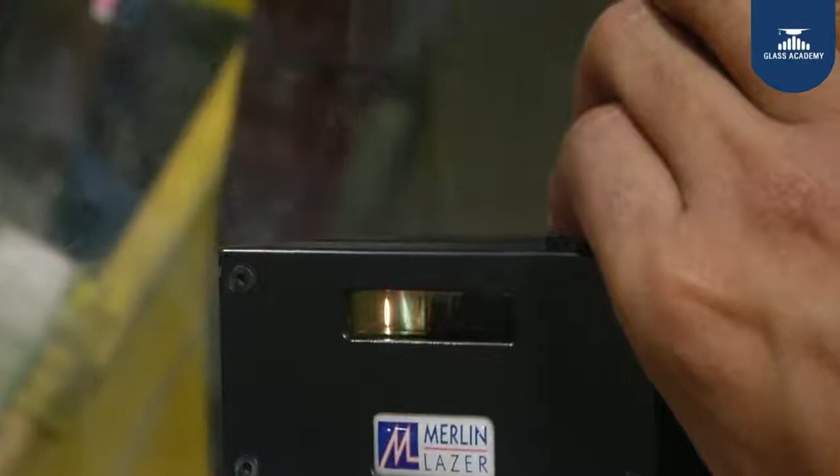Now this is one more test to determine the properties of the base glass that we get from a supplier, known as the visual light transmission test. For any glass, like Saint-Gobain, they keep a remark as the nomenclature for a particular product, for example ST467. Here ST indicates it is a reflective glass, 4 indicates the color of the glass, which is green, and 67 indicates the visual light transmission in the glass. So through this test, we are ensuring the light transmission in the glass is 67%.